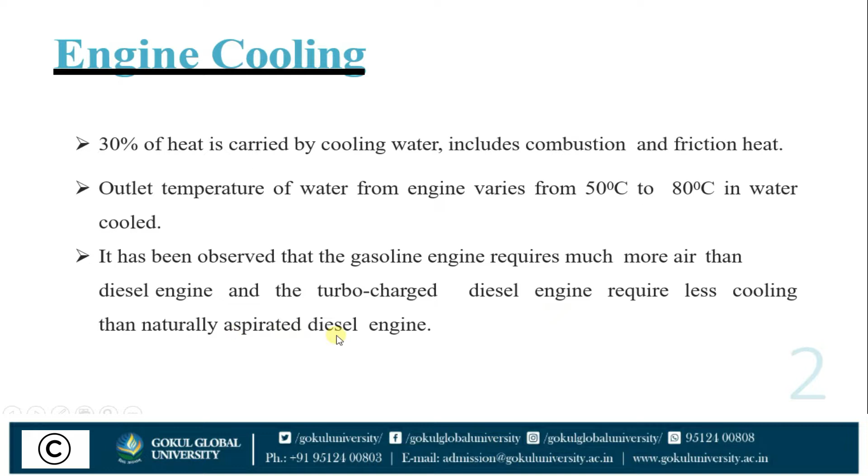What is engine cooling and why is it needed? About 30% of heat is carried away by cooling water, including combustion and friction heat. The outlet temperature of water from the engine varies from 50 degrees Celsius to 80 degrees Celsius in water cooled engines. It has been observed that the gasoline engine requires much more cooling than the diesel engine, and the turbocharged diesel engine requires less cooling than a naturally aspirated diesel engine.

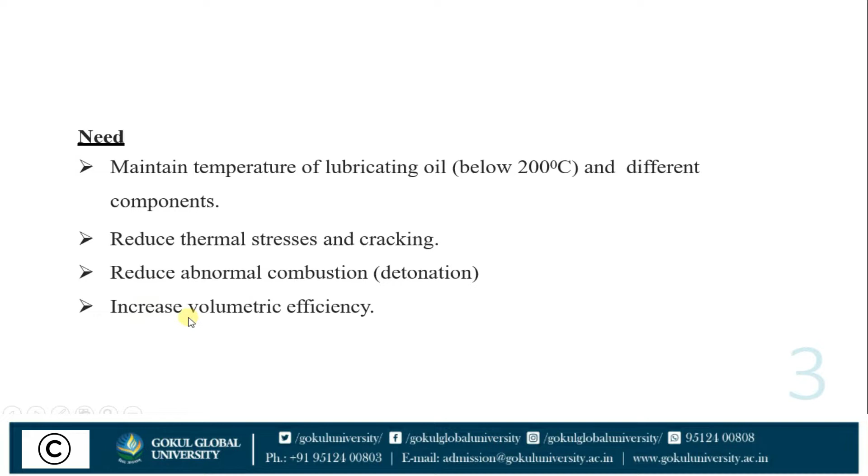So what is the need of engine cooling? First is to maintain the temperature of lubricating oil below 200 degrees Celsius and protect different components. Next is to reduce thermal stresses and cracking effects. Next, reduce abnormal combustion, which is called detonation, and increase volumetric efficiency. These are the requirements for why engine cooling is needed.

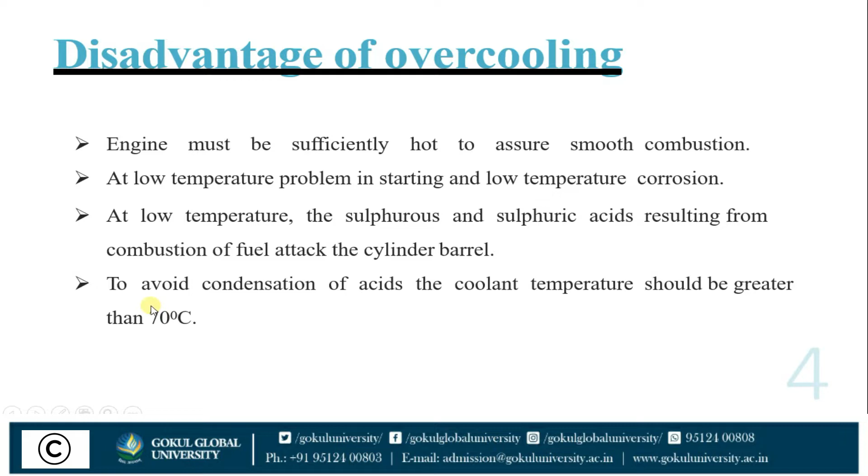Now, while cooling, we must keep in mind that the engine must not be overcooled. The disadvantage of overcooling is that the engine must be sufficiently hot to assure smooth combustion. At low temperature there is a problem in starting, and at low temperature there is corrosion. At low temperature, the sulfurous and sulfuric acid resulting from combustion of fuel attack the cylinder barrel. To avoid condensation of acids, the coolant temperature should be greater than 70 degrees Celsius. So overcooling will be a big problem for the engine.

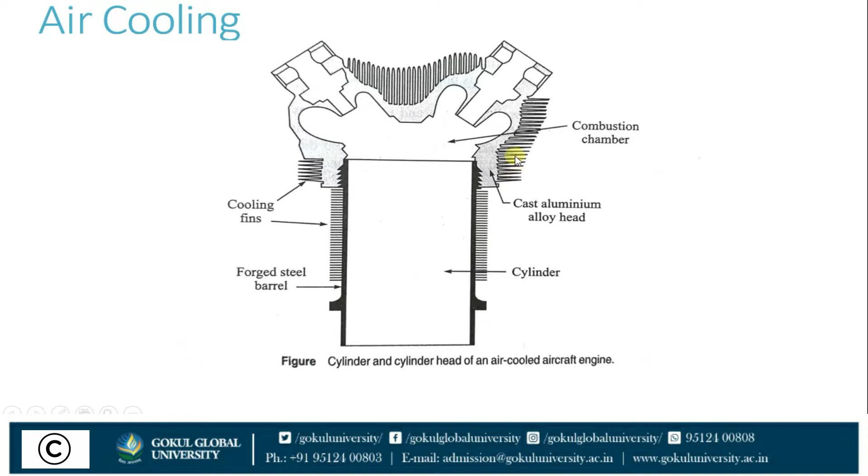So this is the air cooling system. This is the engine cylinder, this is the inlet port, this is the outlet port, and there are some fins provided here. These are the cooling fins, which you can see in bike engines, which are fin type engines. These are the cooling fins provided for the air cooling purpose.

Now let's see in detail. Air cooling is a method of dissipating heat. It works by making the object to be cooled have a large surface area, or have an increased flow of air over its surface, or both. An example of the former is to add fins to the surface of the object. If we have to cool the engine by air cooling system, simply add fins to the surface of the object, either by making them integral or by attaching them tightly to the object's surface to ensure efficient heat transfer. In case of the latter, it is done by using a fan blowing air into or onto the object that one wants to cool.

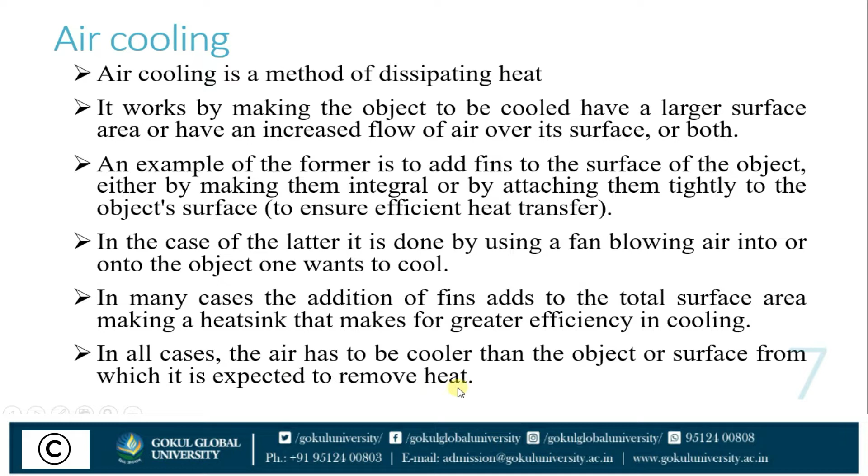So by using a fan blower, we can also cool the engine. In many cases, the addition of fins adds to the total surface area, making a heat sink that provides great efficiency in cooling. In all cases, the air has to be cooler than the object or surface from which it is expected to remove heat. So this is how air cooling works. These are the fins provided on the engine.

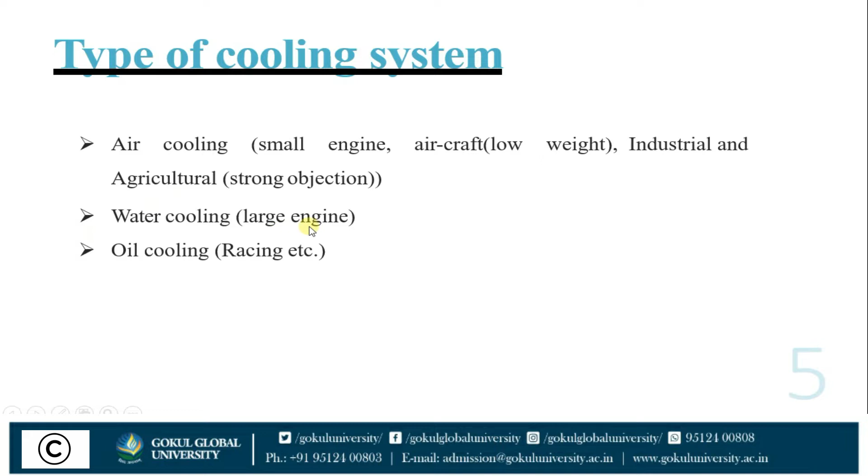Now, the second type is water cooling, which is used in large engines. So how does it work? In water cooling, cylinders are enclosed in a water jacket. The flow path as well as the local velocity should be carefully planned to cool highly thermally stressed areas. So the design of velocity is planned so that the high stress areas are cooled as per requirement. Local velocities greater than 3 to 4 meters per second are used to provide reasonable heat transfer. The cast surfaces are usually machined to improve the heat transfer coefficient. Sometimes drilled coolant passages are provided to cool highly stressed parts.

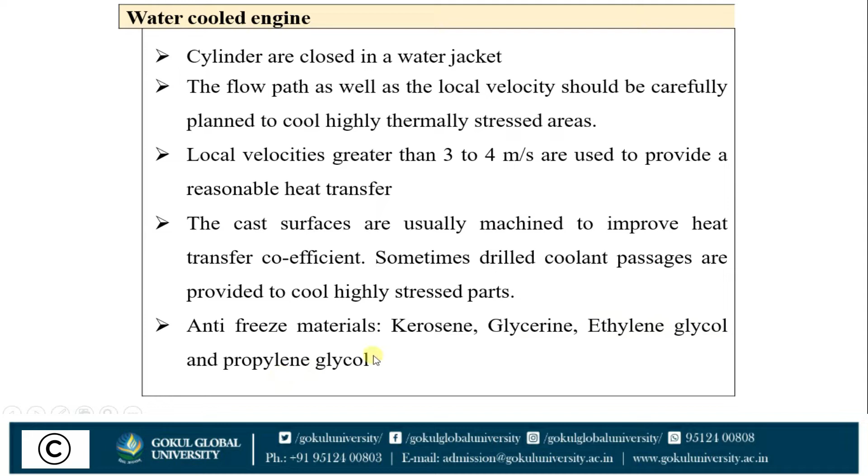Now, what are the antifreeze materials? These are the antifreeze materials: kerosene, glycerin, ethylene glycol and propylene glycol. So these are the antifreeze materials which are used as coolant.

Some antifreeze solution forms sticky deposits on the cylinder and reduces the heat transfer coefficient. Chromates are used as additives to cooling water to prevent these deposits. This is one additive which is added with the cooling water to prevent the deposits.

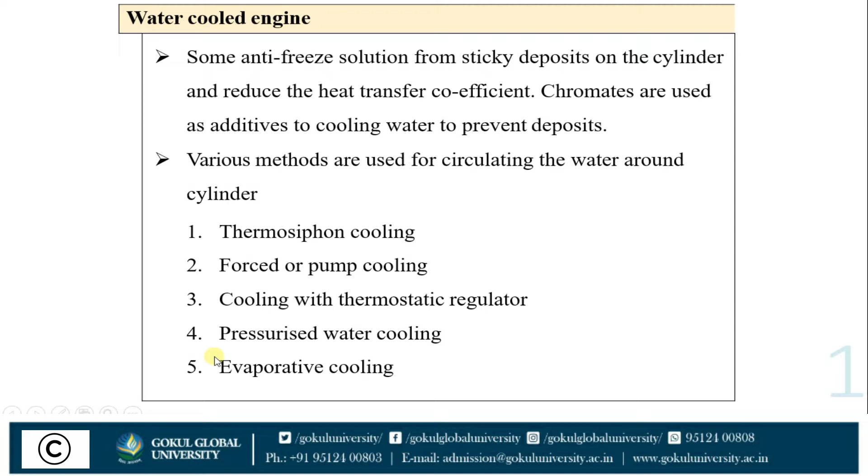There are various methods used for circulating water around the engine cylinder. First is the thermosiphon, second is the forced or pump cooling, third is cooling with thermostatic regulator, fourth is pressurized water cooling, and fifth is evaporative cooling. These are the methods we will see one by one.

First is thermosiphon cooling. In thermosiphon cooling, water circulation occurs due to temperature and density difference and is independent of the engine speed. The circulation of water is not dependent on the engine speed; it happens due to the temperature and density difference.

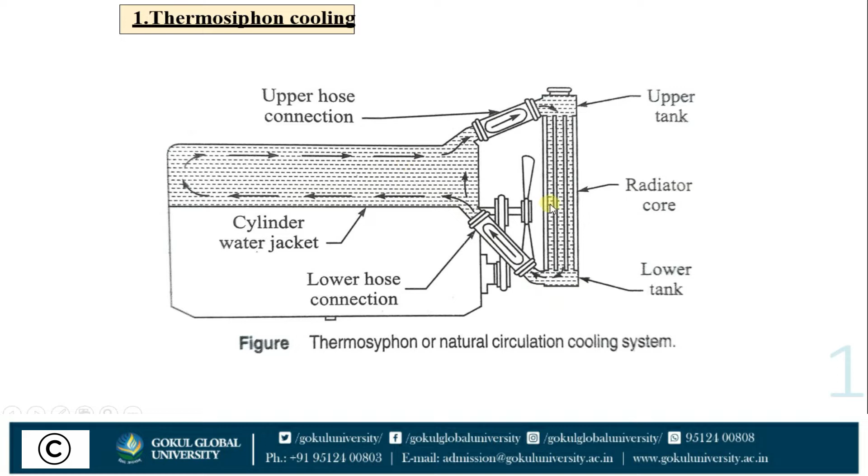This is the diagram of thermosiphon or natural circulation cooling system. This is the cylinder water jacket, this is the lower hose and upper hose connection, this is the upper tank, this is the radiator which is a heat exchanger, and this is the lower tank. This is the flow of water circulation because of the temperature difference. As the temperature decreases, the water flows up and down. This is the movement of the water circulation.

The rate of circulation in thermosiphon cooling is very slow and insufficient. The circulation of water starts only after the engine has become hot enough to cause the thermosiphon action. As said, this circulation is not dependent on the engine speed, only on temperature and density. So when the engine starts and becomes hotter, the circulation of water will start. When the engine is stopped, the circulation of water does not start; it remains at rest.

The radiator should be above the engine for gravity flow of water to the engine. Since the water movement depends on temperature and gravity density, the radiator placement should be above the engine so that water can flow due to gravity. This is the thermosiphon cooling system.

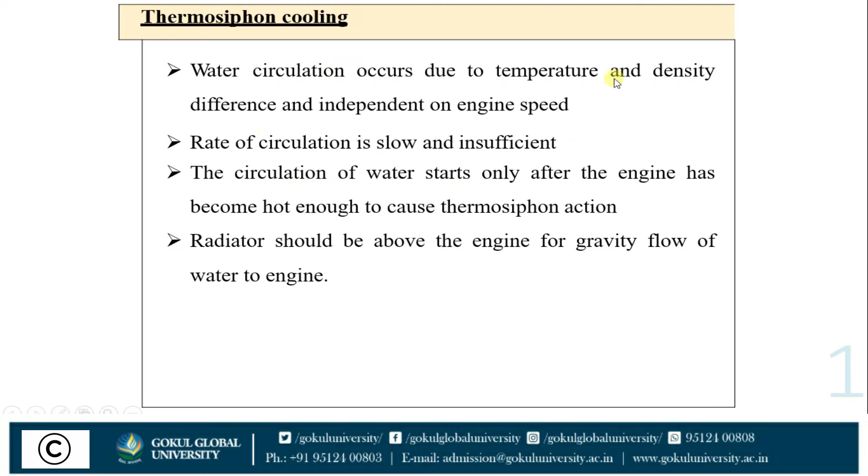The pump circulates the engine water, and it flows through the engine, and from the radiator it is again circulated. So here the pump is used. In thermosiphon there is no pump; it works only because of temperature and density difference. But here the pump is attached to circulate the water, that's why it is called the force or pump system.

The advantage of the force system is that cooling is ensured under all conditions of operation, whether the engine is stopped or working. This circulation of water is always on, so the advantage of the force system is that cooling is ensured under all conditions.

Now what are the drawbacks? First, the cooling is independent of the temperature. Whether the temperature is high or low, the cooling continues. The water circulates continuously because the engine is operating and the pump is running, regardless of temperature. This may, under certain circumstances, result in overcooling of the engine. So even when there's no requirement for cooling, the water is still circulating, which leads to an overcooled engine, and this is a big problem.

While moving uphill, the cooling requirement increases as the load on the engine increases because more fuel is burned. However, the coolant circulation is reduced, which may result in overheating of the engine. When there is an uphill requirement, more fuel burns, the temperature becomes much higher, the coolant circulation is reduced, and this creates overheating of the engine. This is again a major problem.

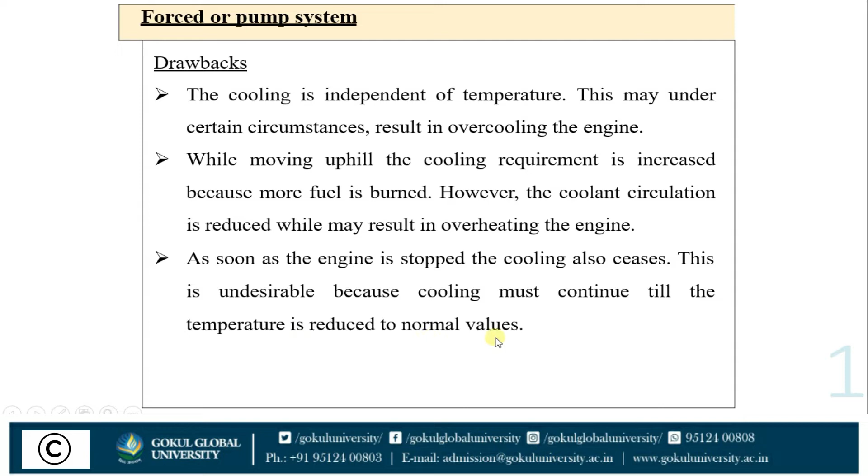Now as soon as the engine is stopped, the cooling also ceases. This is undesirable because cooling must continue till the temperature is reduced to the normal values. If you stop the engine, the pump will also stop, and this will stop the water circulation, which is not required. So cooling must be continued till the temperature is reduced to normal values. This is again a very big problem with the force pump system.

Now, too low a cylinder barrel temperature may result in corrosion damage. Thermostat is used to stop flow of coolant below a preset cylinder barrel temperature. There is one valve which is the heart of this diagram, called the thermostat valve. What is its function?

Thermostat prevents the water from circulating through the radiator until its temperature has reached a suitable value. There are some suitable values; when this value is reached, the water has to start circulating. So the thermostat valve will prevent the water from circulating if there is no requirement, and if there is a requirement, then it will start circulating.

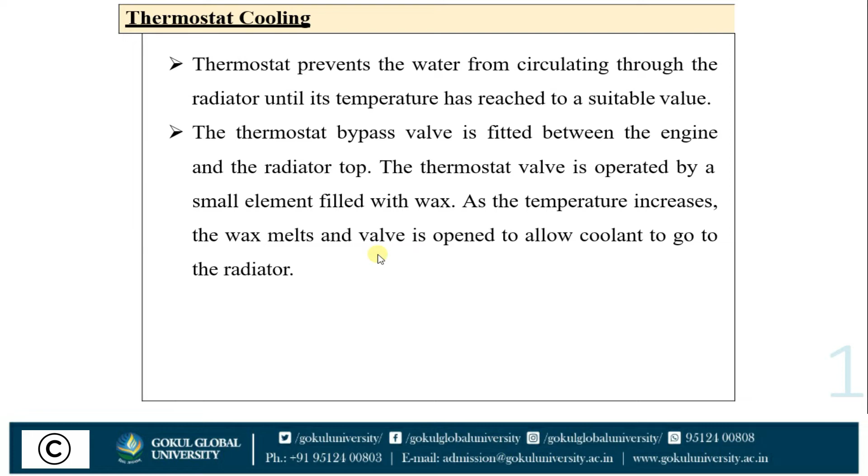The thermostat bypass valve is fitted between the engine and the radiator top. It is operated by a small element filled with wax. As the temperature increases, the wax melts and the valve opens to allow the coolant to go to the radiator. So when the temperature increases, wax automatically melts, and because of this melting, the valve opens to allow the coolant to go to the radiator. This is how the unnecessary flow of coolant is reduced because of the thermostat valve.

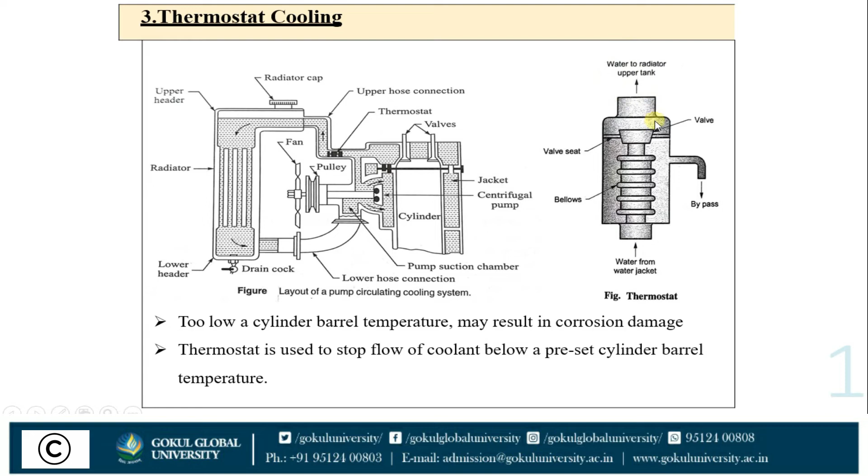This is the arrangement, this is the valve, this is the bellows, the bypass valve. If there is a requirement of bypass of the coolant, then it will flow from here. Water from the water jacket flows inside this bellows, which is full of wax. When the temperature increases in this, the wax will melt and the flow of water from the water jacket goes to the radiator. This is how the thermostat valve operates.

Now the next one is the pressurized water cooling system. A water pump is an important part of the engine cooling system. It provides circulation of engine coolant antifreeze through the cooling system. A water pump pushes the coolant through the water jacket passage in the engine cylinder block and cylinder head, and then out into the radiator. This helps to keep the engine from overheating. The hot coolant passes through the radiator where it cools down and then returns back to the engine.

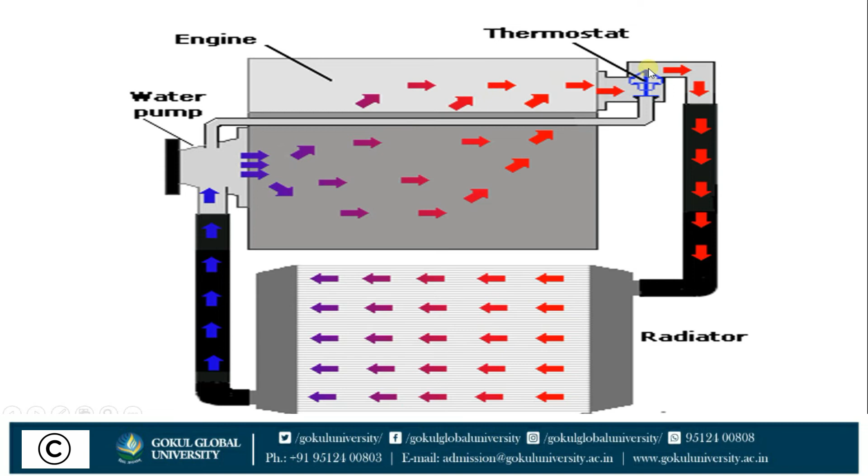It goes to the engine, absorbs the heat of the engine cylinder piston components, and becomes hotter. Then it's again circulated to the radiator, cools down, and is transferred back to the engine. This is how engine water circulation is done with the help of the water pump. That's why it is called pressurized water cooling system.

Now next is the evaporative cooling system. This is the diagram. There is water, and this is a pump used for water circulation, the engine block, and the steam. There is a vent in the cap which will collect the steam and convert it back into water.

So how does it work? This method of cooling utilizes the high latent heat of vaporization of water to obtain cooling with a minimum amount of water. The cooling circuit is such that the coolant is always liquid, but the steam formed is flashed off into a separate vessel.

So when the water circulates with the help of the pump, it goes to the engine, absorbs the heat, cools the engine, and becomes steam. The steam is collected in the vent, where it is gathered in a separate vessel and converted back into water, while the coolant remains always in a liquid state.

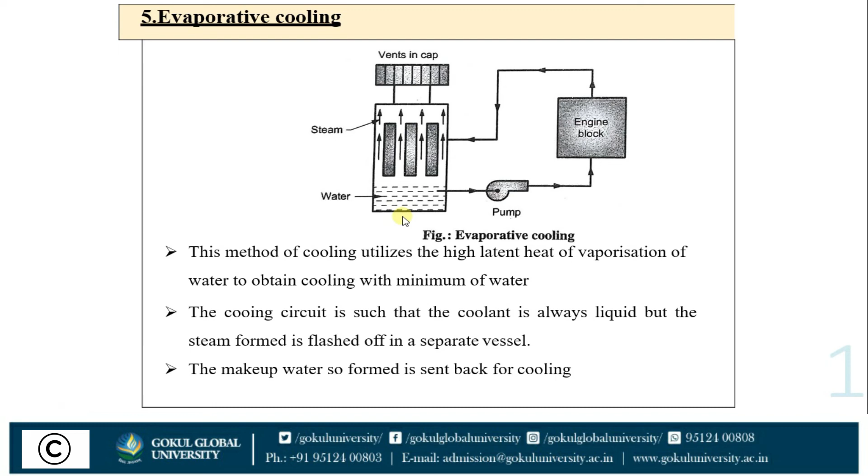So the makeup water formed is sent back for cooling, and the collected water is again sent back for the cooling purpose. Water is pumped to the engine for circulation, it absorbs the heat and becomes steam, which is collected in a separate vessel. There it becomes water again and is circulated once more for cooling. This is how the evaporative cooling system works.

Now let's see the comparison between air cooling and water cooling. In air cooling, there is no danger of water freezing at low temperature, as there is no water. In water cooling, there is a danger of water freezing at low temperature; in some cases, if the temperature becomes low, there are chances of water freezing in the water cooling system. So this is the disadvantage.

Second, for air cooling, maintenance is low and design is simple, as there is no pump or any other mechanical components. While in water cooling, maintenance is high due to the radiator, and the engine design is complicated.

In air cooling, the engine warms up quickly, while in water cooling, as the engine size is larger, it takes comparatively more time. In air cooling, specific fuel consumption is higher, and in water cooling, specific fuel consumption is lower.

In air cooling, weight to power ratio is low, as the engine size and weight are small. While in water cooling, the weight to power ratio is high. Air cooling is suitable for low capacity engines, while water cooling is suitable for high capacity engines.